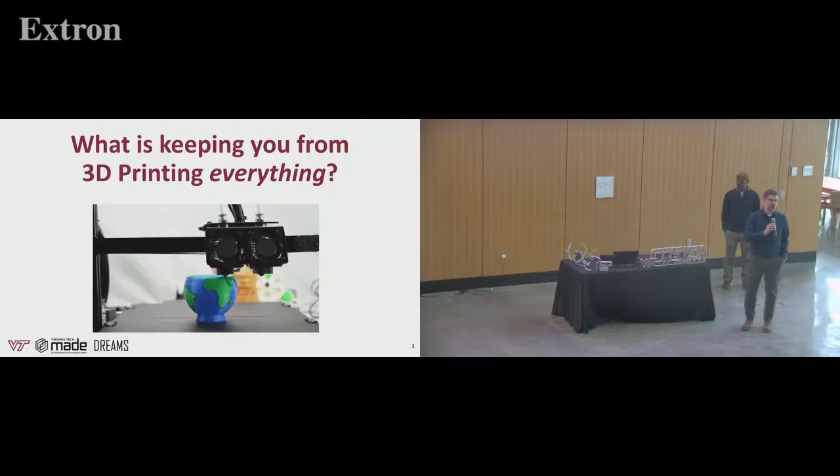So young and innovative. All right, we're going to start off with a question. What is keeping you personally from 3D printing everything? What's keeping you from 3D printing stuff? Because things fall down? Is that your gravity is the answer? Yeah, like can't print stuff in the air. Okay, what other limitation do you face on a daily basis?

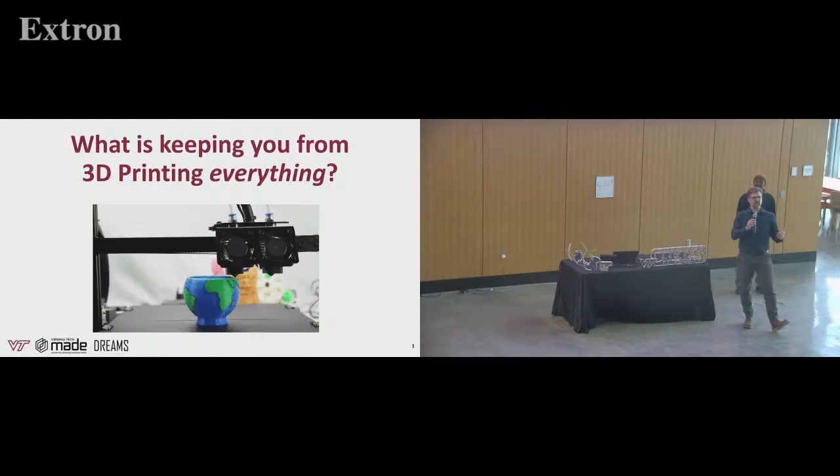Okay, all right, what else you got? What other reasons are making you... Why aren't you making everything with 3D printing? What keeps you from doing it? It's too expensive. It's a lot of plastic. Thank you so much for that one. I'll pay you later. I don't own one, and I have not done any of the training to access any of the studios, and I don't have any time. Thank you, Tim. All right, so we'll pay you both afterwards.

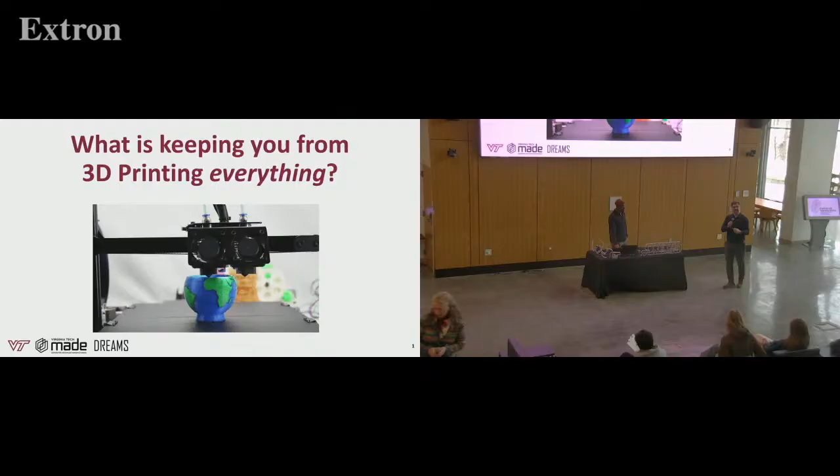Yeah, so one challenge might be it doesn't have the materials you want. Another reason might be it's too expensive. Another reason is it does still require a lot of expertise, although that's getting a lot better in the plastics world. But did you know you can 3D print metal?

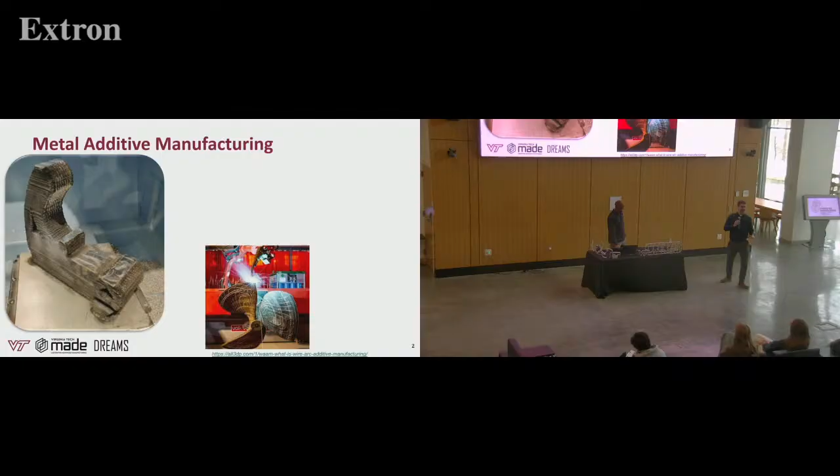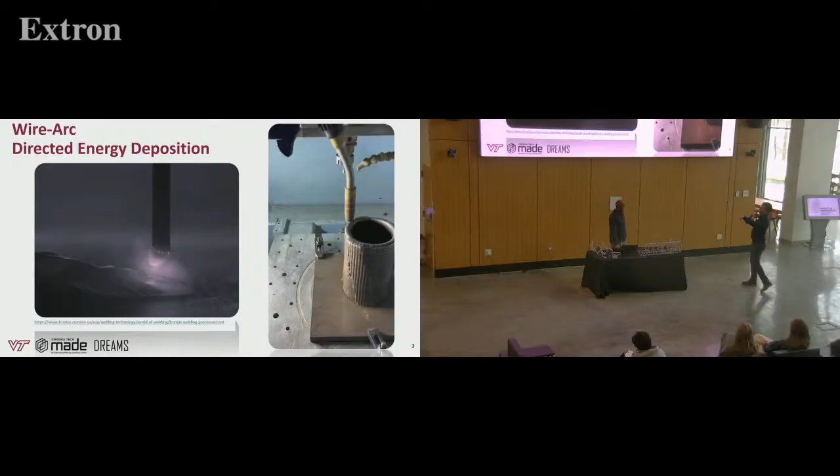That's an image on the left of something we made at Virginia Tech. You can make really large things with metal printing, and this is not extruding molten metal out of a nozzle. It's actually, in this case, literally a welder duct taped to a robot, and just like plastic extrusion, it's depositing metal layer by layer, and people are using it to make things like bridges and propellers for Navy submarines.

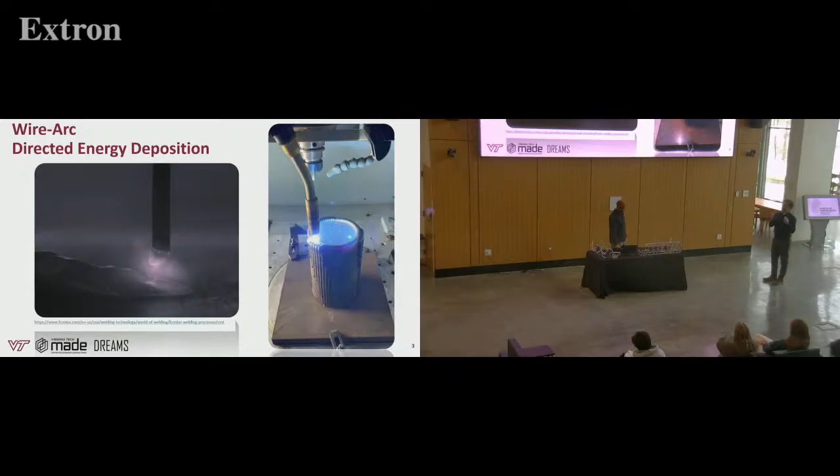The challenge with that process is it's expensive, although not as expensive as other metal processes, because it's just a welder duct taped to a robot, perhaps. But it requires significant expertise to operate that machine, handle the tool pathing and the metallurgy. And even when you're done printing, you need another expensive machine, like a vertical bandsaw, to cut that metal part directly off the plate, since it's actually welded to it. So it requires another piece of equipment just to get the part off. Then you have to do additional machining to clean up the rough surface to get to the final shape you want.

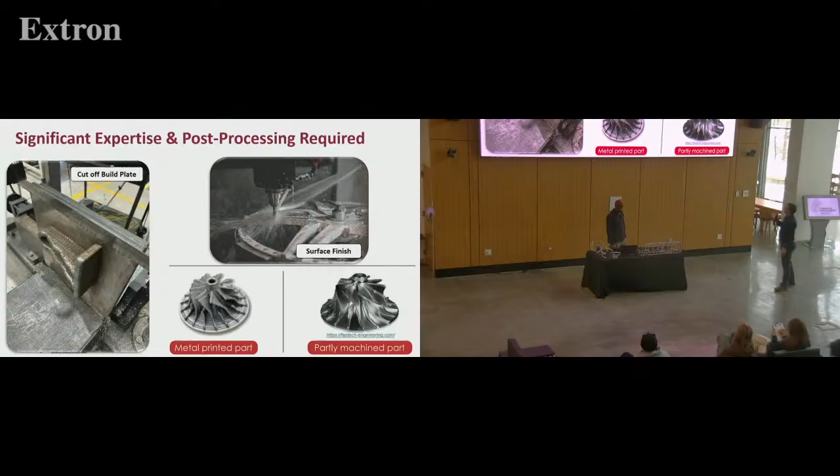So the question we asked is, what if you could really lower the barrier to metal 3D printing the way we did for plastic 3D printing almost 10 years ago? That's the question we'd like to propose to you today and what our team worked on.

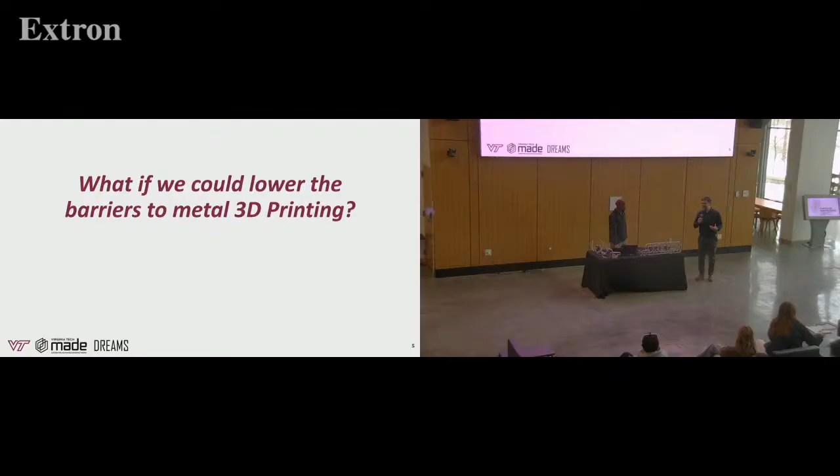This team was led by Bimnet Mola, a PhD student in our group, alongside Ian Ho, another PhD student in mechanical engineering, and our collaborators Lisa McNair in engineering education, and ICAT and CENI, and Brook Kennedy in industrial design. On the next slide, you'll see two key innovations that helped us lower the barrier, and they both belong to this very smart PhD student, Bimnet.

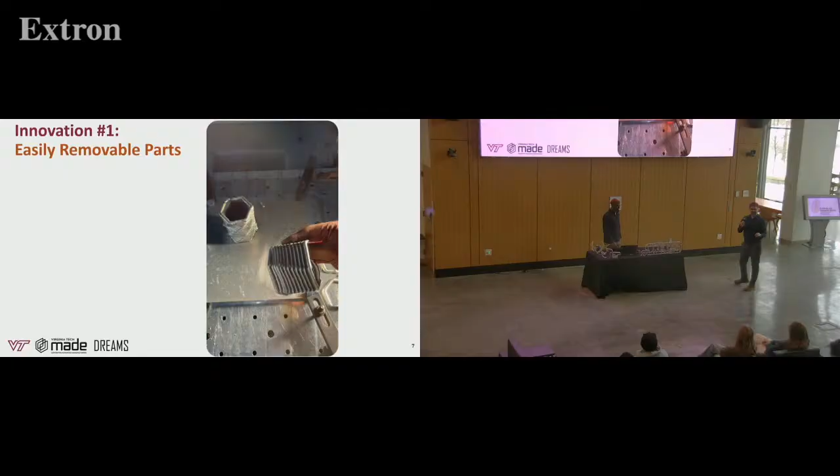The first one is that Bimnet found a way to set the settings of the welder so it doesn't weld directly to the part very strongly. Traditionally, you cannot remove the part off the build plate; you have to go to that bandsaw. But Bimnet discovered a way to have a very loose weld on that first layer that allows you to literally just remove the part, maybe not always with your hand, maybe with a tap of a hammer. This allows us to completely skip that second machine, and that expensive cost, expertise, and danger. You can literally just tap the part off the build.

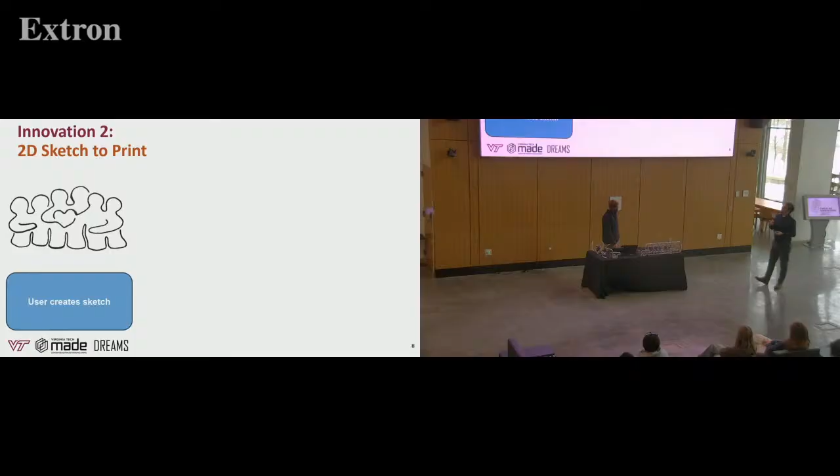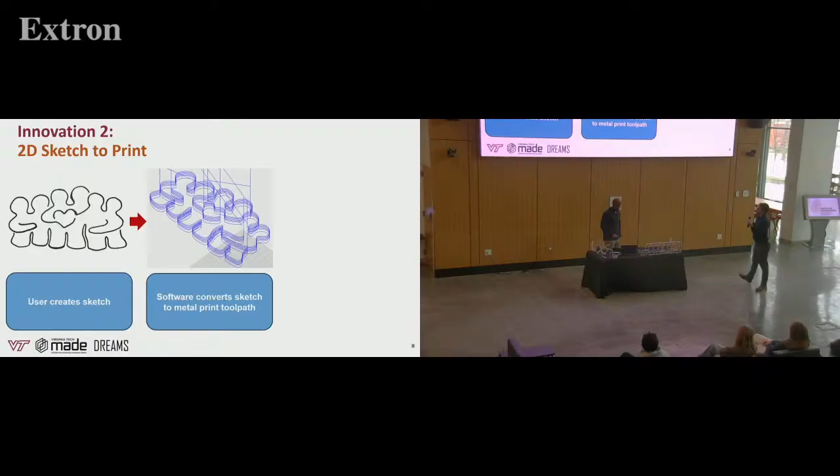The second innovation Bimnet worked on, along with other students in the group, was design. That 3D software has another barrier to entry—forget operating the machine, just learning how to design things. So we said, what if you could just have a napkin sketch, a 2D drawing, and take an image of that? Could we create software that automatically takes in that sketch, populates as many layers as you want, and then automatically generates all the instructions to the machine to actually print it in metal? That's the big idea of sketch to print in metals.

So what we did is actually create a graphical user interface that allows you to do that automatically. You literally just upload your camera photo and work through the process to get to step 4, where all those instructions get sent to the machine. In this case, we had a high school student intern work with us over the summer to get that done, which is super cool.

And I'm going to pass it to Bimnet for the next idea we had, the third innovation, if you will.

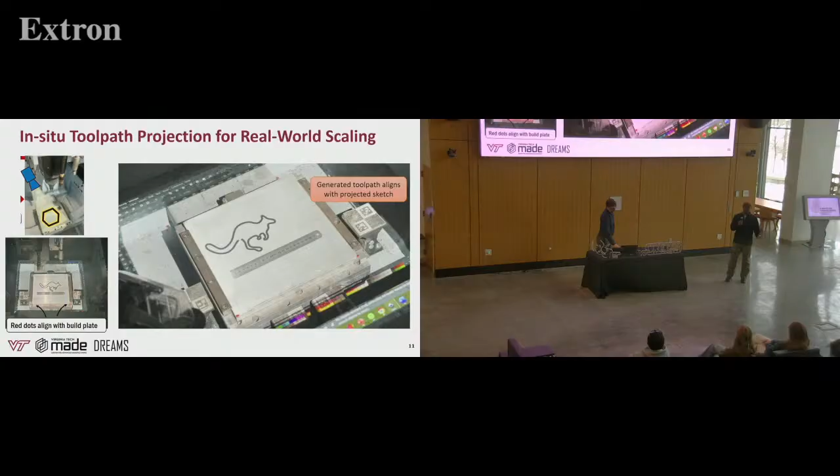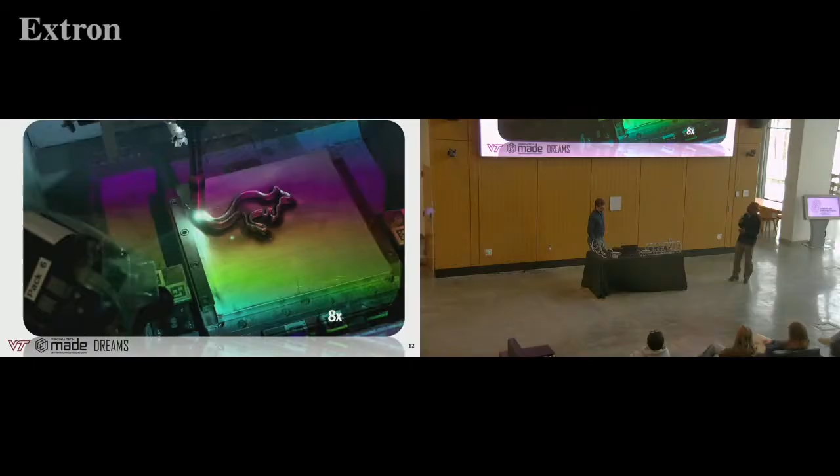One of the things we did, as Dr. Williams just spoke about, is create this workflow for sketch to metal 3D part. But in the world of design, if you're working on a computer, at least I can't visualize what a millimeter will actually look like from the screen to the physical world. So we incorporated a projector into our print space so we can project the design we want to manufacture. This lets us work in the real world, kind of like augmented reality—this is a very V1 step of that. We project the drawing, and the machine is 1-to-1 scale with that projection, so wherever your hand goes is where the machine will go to print that design. That's what it looks like in real life. We've tested it and manufactured some parts of what you're actually looking at.

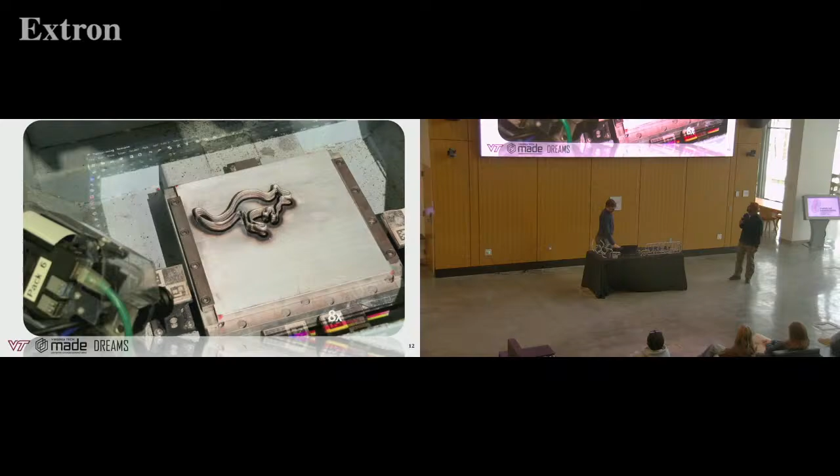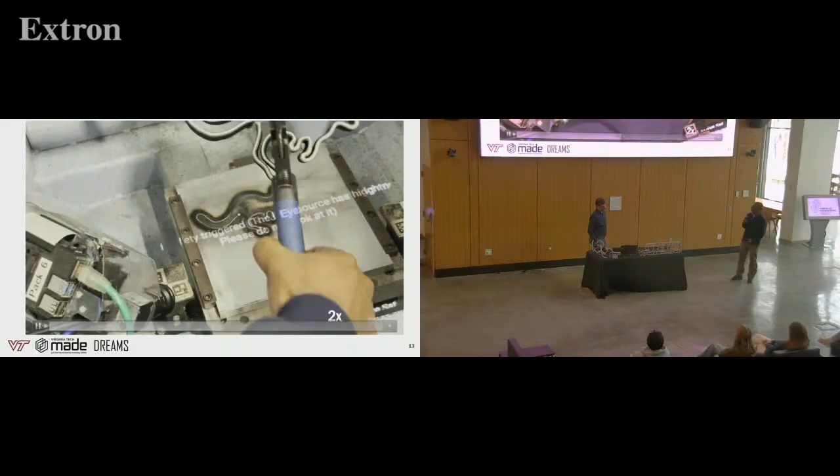This is the printing process after we've validated the projection, and then once it's done printing, you can walk up to the machine and take off the part, as so.

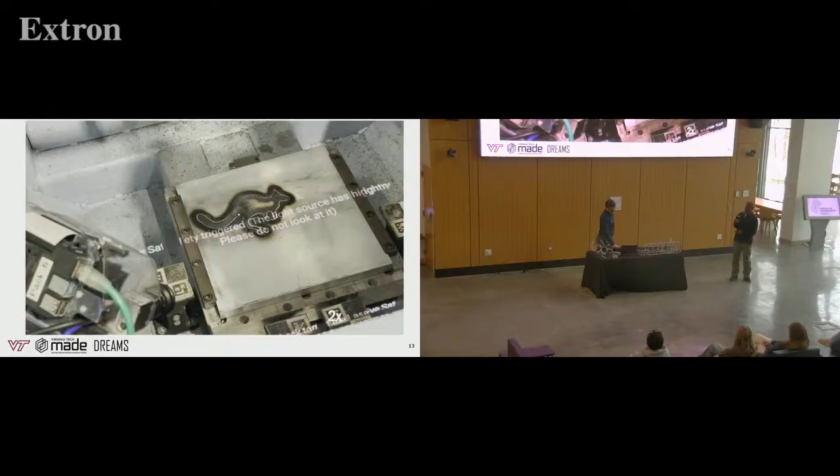It's a very simple, really easy to use workflow where we're taking the expertise out of the process, so that as long as you have a pen and paper, you can make this work for you. To actually design something like this and tool path it, in our lab traditionally it would take several weeks to prepare the file just to be able to print.

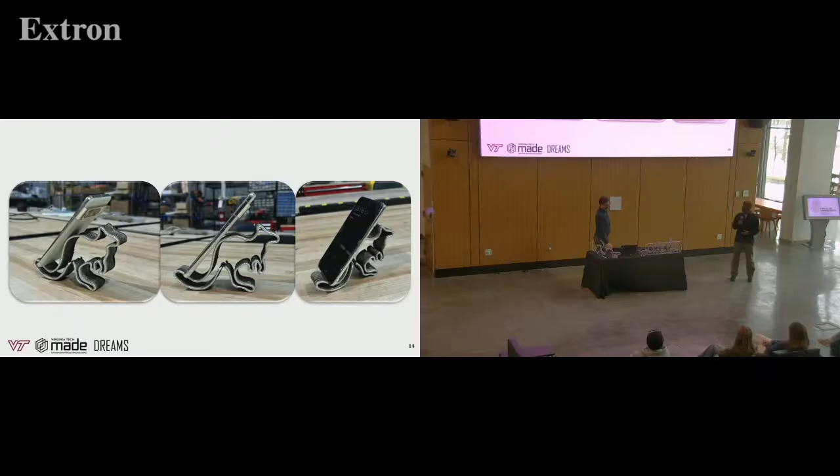But we're removing all those steps for early designers, and what you're actually looking at is a design developed by some 5th graders. Because we've made the design process so simple, we can put this in the hands of users. Part of the ICAT grant, in collaboration with Lisa McNair, involved outreach programs where we brought in elementary and middle school students to work with the software.

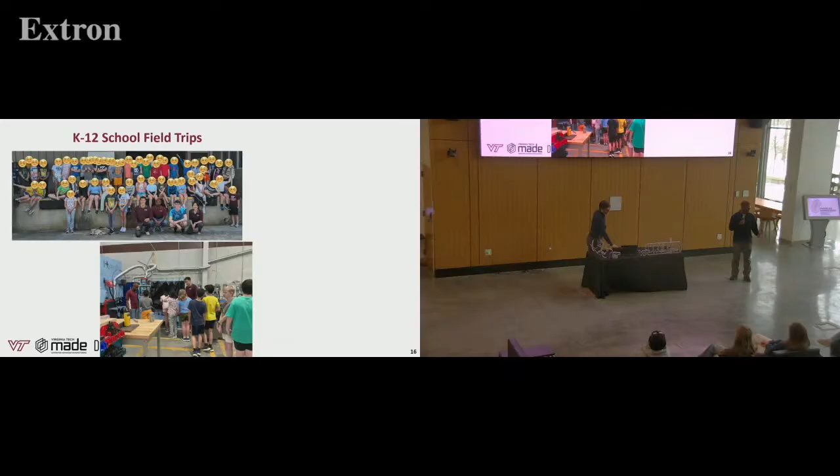Here you can see them designing their parts. Then we took them to the actual lab so they could see their parts being printed. So they've seen the entire manufacturing life cycle, from design to manufacturing, and they could take some of their designs home. We're not printing everyone's designs, but some kids got their designs printed out.

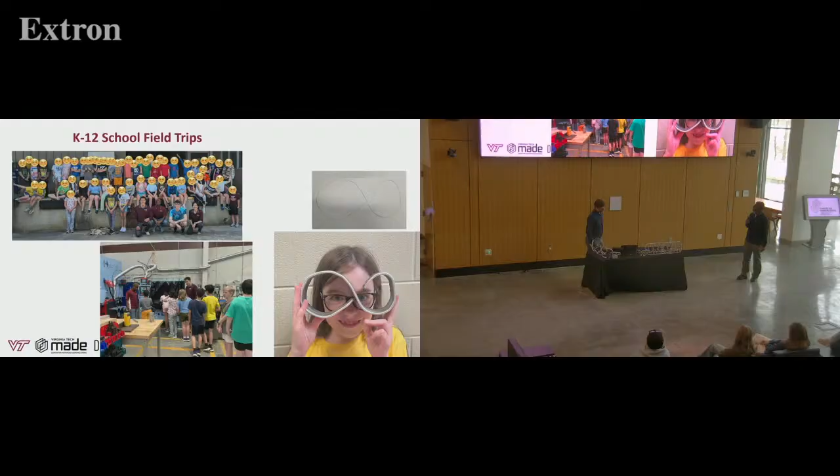Working with Lisa and Phyllis, we did a lot of outreach with CENI at ICAT, like Hokie for a Day and the Science Festival.

One of our favorite activities the students came up with was bringing lots of different 3D printed parts and asking the students, hey, is this 3D printed? What's amazing to me, over many years of doing this, is we've changed from no one knowing what 3D printing is to now everyone thinks they know what 3D printing is. What's great about this exercise is they all push the metal to the not-printed side, but occasionally they'll see something and say, hey, that has layers. So they start to think about this, and it's a really fun way to engage lots of students across the region in this area.

BIMNet also led a lot of summer camps with the CEED group at Virginia Tech and the College of Engineering, the Center for the Enhancement of Engineering Diversity, where we got to do workshops with people historically underrepresented in STEM, in middle school and high school, pre-college students coming to Virginia Tech to learn what it means to be an engineering student, and they're actually in the lab doing the same design exercise.

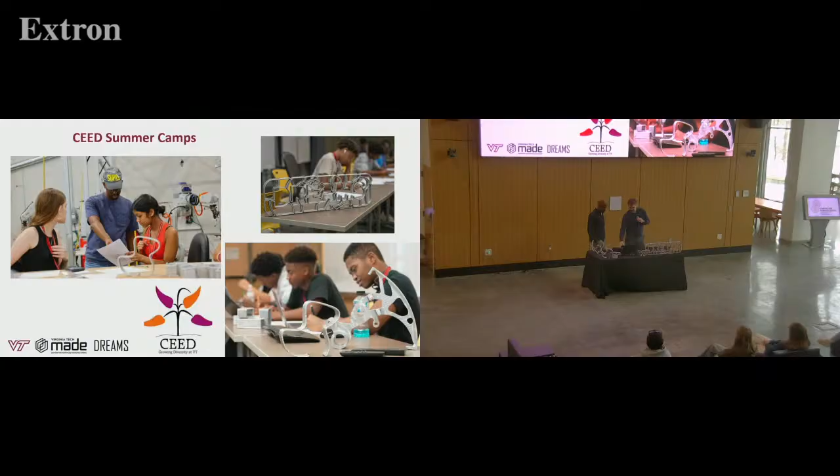What's interesting about that exercise is we have to teach them that yes, this process is great, but it does have some catches and caveats. So we actually teach them about design for manufacturing and engage them in drawing, sketching, and then printing their parts. And I'll go back to BIMNet because he also worked with Lisa on the ID Pro class, which is a pretty cool exercise as well.

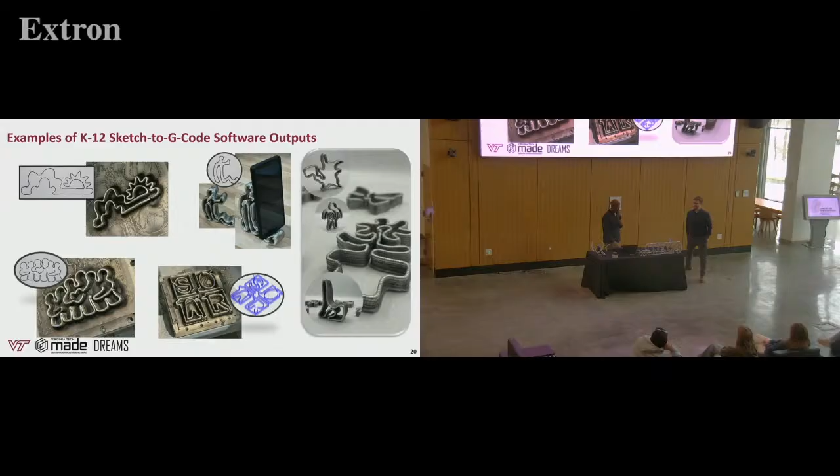Last year, fall '24 and spring '25, we worked with a group of undergrad students to take these past simple designs, like you saw in the last slide where they're just simple contours, and we wanted to see what we could actually do in terms of function with this process. With a team of undergrads across disciplines from engineering to architecture, we started to think about the fact that we're printing aluminum, or metal that is conductive. Can we use the part itself to both structurally reinforce the structure and use it as a conductive pathway for electricity? So we did some initial tests where we embedded the metal within the plastic.

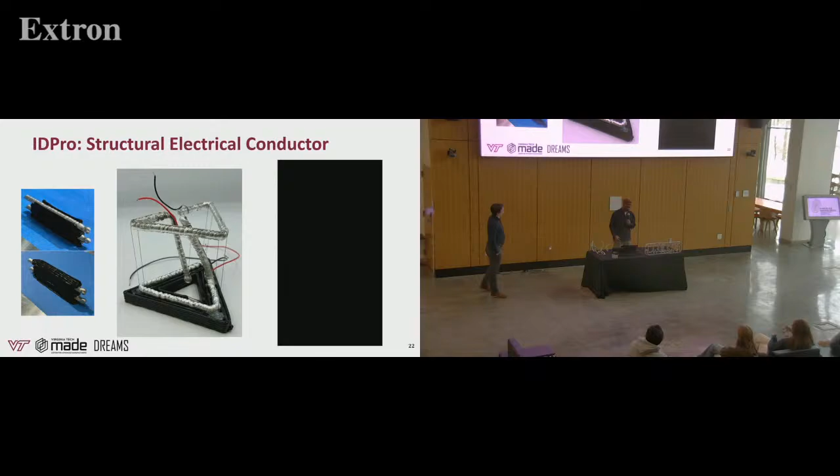We were able to build a tensegrity table. It's essentially floating, not contacting each other. The strings provide the tension for it to stand up, and the metal provides that structure and the electrical pathway. The wires you see here are just for the final contact points between the battery and the structure, and then from the structure to the element we're powering. In this case, we put a fan on there.

I would have preferred a lamp, but I was working with a ton of engineering students, and they wanted to put a fan on there. But the main contribution here is we're pushing this past what we thought we could do with this process. Aluminum is very pliable, so you can bend it into the shape you want and use it as a structural reinforcement and as the pathway for electricity. So some really cool things you can do with that process.

And the semesters were kind of split up. We had some machine troubles, but the first semester, everything you saw in the last slide, the undergrads did all of that work. It was led by them.

And then in the spring semester, we had some issues. Yeah, so basically Lisa and the team at CENI then proceeded to think about bringing in teachers and actually getting them engaged in 3D printing and finding ways that they could teach some fundamental concepts using manufacturing to support the basics of physics. And that's something that's really impactful because now you're not just teaching one student at a time, you're teaching the teacher who can then go back to their classroom and continue to disseminate that. So some great work from Lisa and the team.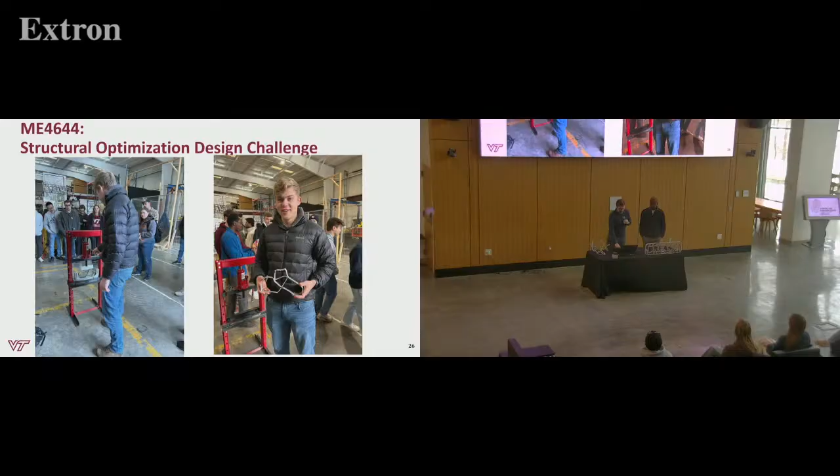But BIMNet and the team have actually supported lots of folks across the university with engineering ideas like this big spring, sort of helical spring idea, and you worked on that with Brooke Kennedy and his team, printed jewelry, the printed sign, and as BIMNet mentioned, the idea that you could actually print these objects flat and then, because it's so pliable, bend them into shape, and then use traditional welding to join them together to make, in this case, a nice wall hanging for one of the other students for fun.

Another collaboration that this enabled, because really what we're doing in our lab is we're creating these new capabilities in what we think are design tools, but we really need to work with designers to think about how to implement them. So I'm really excited to see some architecture students here in the front row, because we'd love to have your ideas on how to actually put this to use.

One way in which we've worked with architects is with Yasaman and Nathan King at the CDR in architecture, where we were actually working on a printed podium. We wanted to have a 3D printed lectern for a big conference we were putting on in September. And over at the CDR, there's this big 10-foot robot with a 100-pound per hour deposition tool that can actually print plastic. So imagine you're 3D printing plastic, but now at a much, much larger scale.

And Yasaman and our student Nima actually came up with this really beautiful, elegant design, and it was really cool and printed really well. But then we noticed one interesting challenge was, podiums are not supposed to do that. So what do we do with that?

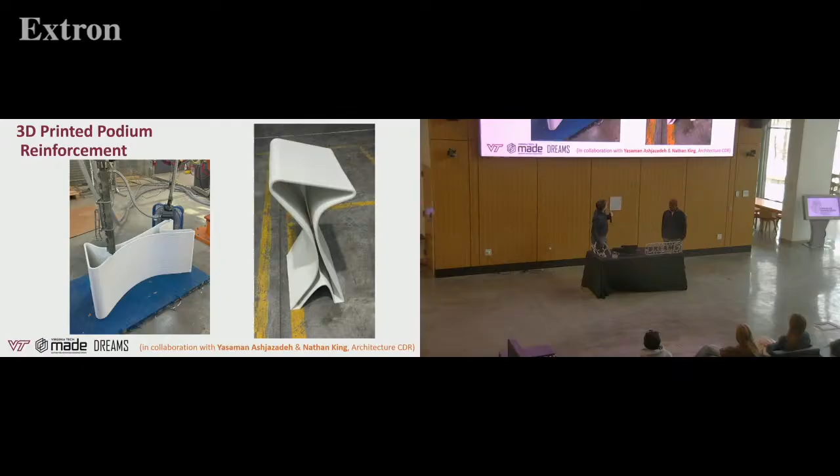So actually, again, working with that new technology of large-scale polymer printing, they then came over to BIMNet and said, hey, is there a way that we could reinforce this afterwards? So BIMNet and the team literally just sketched by hand ideas about how to reinforce this, printed it, and then actually heated the metal up and heat set it into the plastic.

So now actually we have a fully structurally sound, elegantly, beautifully reinforced structure. So now we have two material systems all printed that enable quick discovery and quick solutions to interesting problems. And in theory, we could have run electricity to this as well.

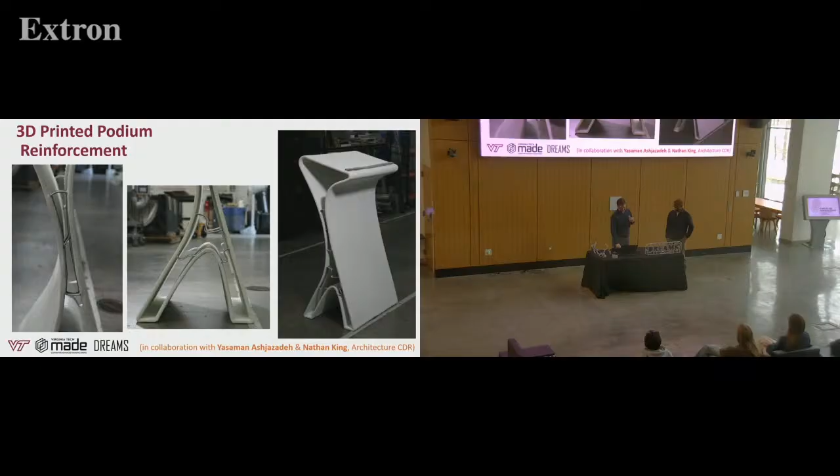So really what this project is all about is trying to democratize metal printing. How do we get this in the hands of as many people as we can, through not only reducing the amount of knowledge required to run the machine, but also the design, going from design to print, also completely eliminating the need to actually have to do a dangerous bandsaw cut, just literally knock it off the part.

And along the way, we got to do some really great work with getting people to learn about advanced 3D printing, changing their ideas about what it can and can't do, talk to them about the new world of metal 3D printing, maybe getting them excited about a career of taking their sort of 3D printing hobby and then seeing how it could translate to an engineering profession or an architecture profession, and that's been really exciting.

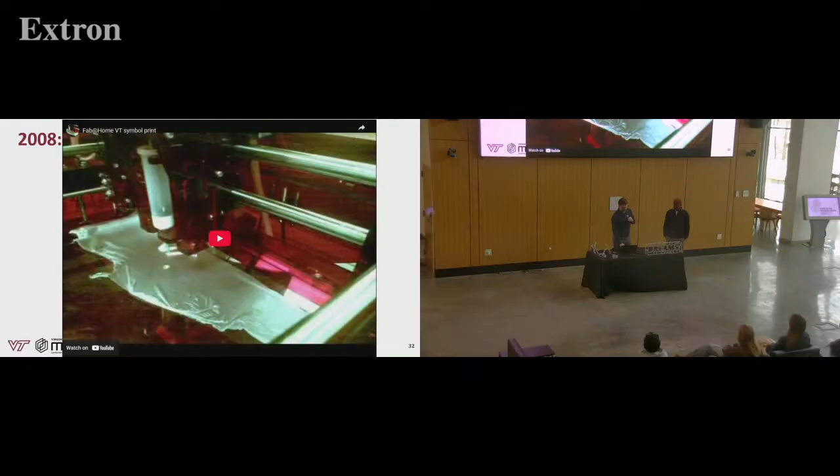So before we go to this last slide, I just want to have one final note. As was mentioned by Phyllis, it's funny, actually, I was teasing you, but really, this is the very first grant I ever had at Virginia Tech. And it was funded by the precursor to ICAT.

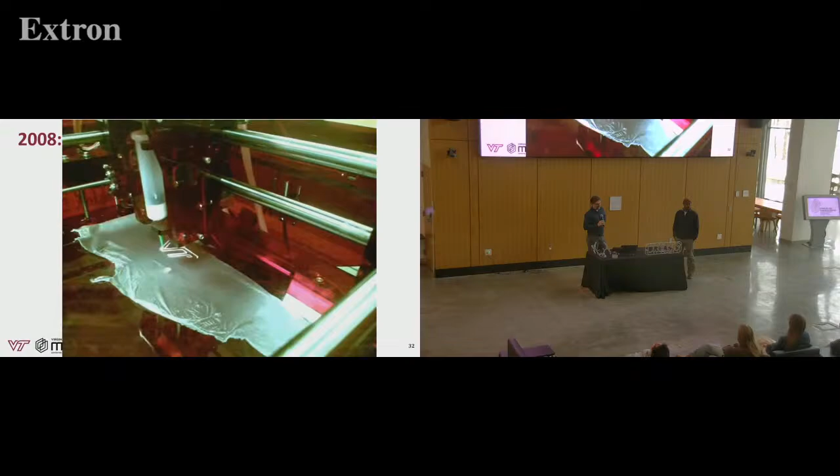And we should mention, Phyllis, if you know about that, that means you've also been here a long time. And this was the first ever desktop scale 3D printer. It's made, it's called the Fab at Home. And it's literally a syringe on a laser cut acrylic frame. And it was made by a friend of mine at Cornell at the time.

And so this small seed grant that we got from the precursor to ICAT allowed us to buy this kit, build it, and then we took it to a bunch of outreach events. And at this time, we were actually printing Cheez Whiz onto crackers on demand. And it was at the time to educate people what 3D printing was, what the idea of layered manufacturing was.

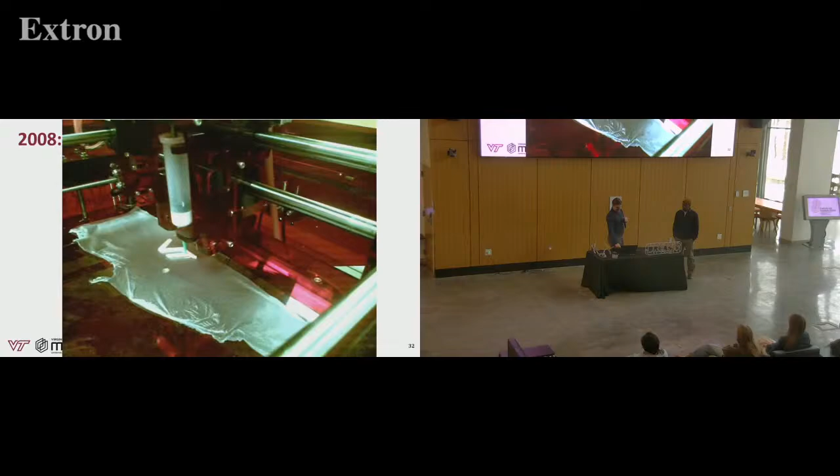And now, not so long, we've come to this world of being able to still engage students, but now teach them about the next evolution of 3D printing and creating tools to engage them in learning, but also engage them as designers and creators, thanks to great students like BIMNet and great collaborators like Lisa and Brooke and Nathan as well. And with that, we'll pause and take questions.

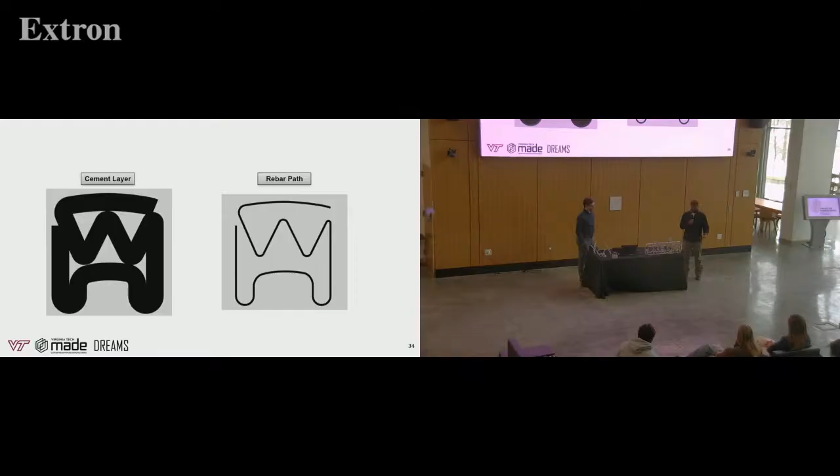Yeah, so all the parts that you're seeing today are of aluminum, but this process is generalizable. So we have started working with steel. We can do this with any material that exists in terms of metal. If it exists in welding wire, we can process it using the same processing technique. So we have some ideas where we want to use the steel as a rebar structure. So if anyone's in construction or civil, one of the ideas is, can we embed the steel within the cement the same way we're embedding the aluminum within the plastic? So some really cool things there.

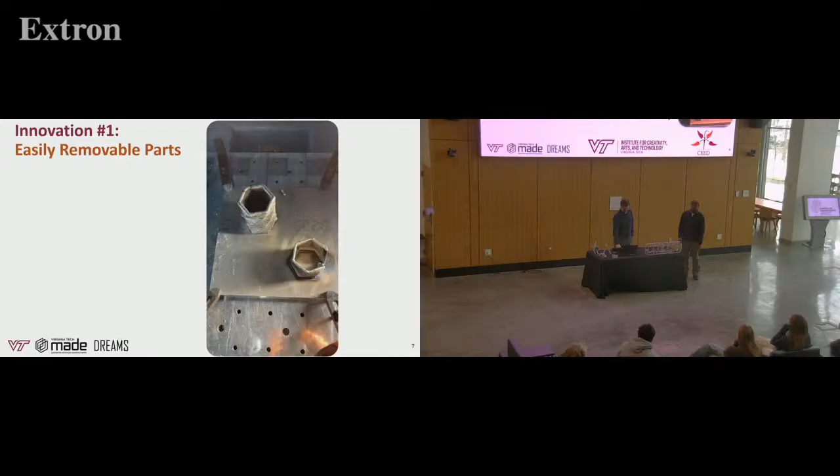You guys said that you changed the first layer so that you don't have to cut it off anymore, you can just take it off. Does that create any structural issues? Does it ever tip over because it's no longer adhered to the build plate?

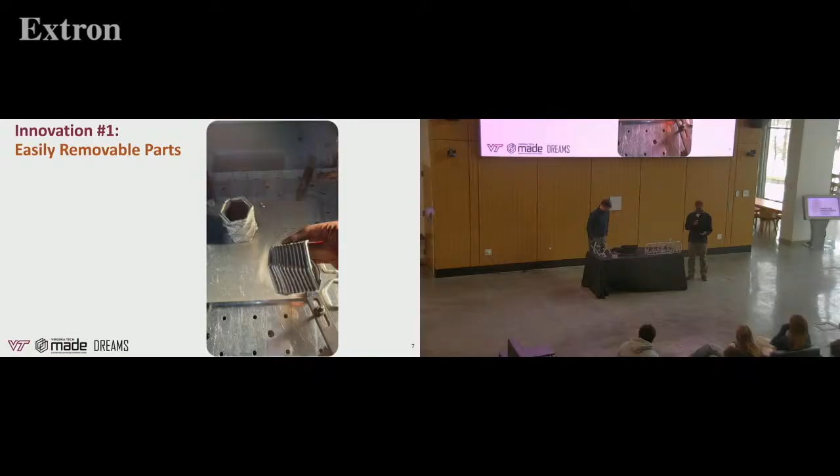That's a really good question. Part of the reason traditional manufacturing permanently welds it to the build plate is due to residual stresses that will actually cause it to delaminate off the build plate. So the first layer is at risk, and in some cases it does start to delaminate, but it won't fully tip over because it's a big enough structure on the first layer. What we're doing in subsequent layers, we're actually using another set of unique processing to reduce that residual stress and prevent it from delaminating. So there's a lot of, my entire PhD is trying to solve that problem, essentially.

Yeah, on that note, there's a different presentation that's his defense, which is all the physics. It's not just magic, it's a lot of really excellent science and engineering by BIMNet and modeling so that it can be adaptable no matter what the material is. You can get this really unique behavior that no one else has ever seen. BIMNet's first idea to use this was, hey, we could actually use it to just quickly print art. That's what this is all about at ICAT: doing some really great engineering and science, and then translating it to work with creative folks to think about how we can use it as a creative tool. The other presentation is a bunch of numbers and math and physics, and at the end we say, oh, by the way, you can also make this really cool stuff. So this is the inverse of that presentation.

I'll be there in a minute.

With what you're doing right now, how much money and time are you saving or potentially saving with doing this compared to just regularly using a welder?

I don't know if there's a real answer to that. We're not competing with the traditional way of manufacturing. On the other side of my PhD, there's some other work we're doing where we're using the same processing technique to build more chunky parts, kind of answering the original question from her right there. But in terms of some other work we're not going to speak about today, we're saving a lot of time and money. Within the process you've seen today, we're not competing with traditional manufacturing, we're really presenting a new novel idea. So there is no metric on time saving and cost saving.

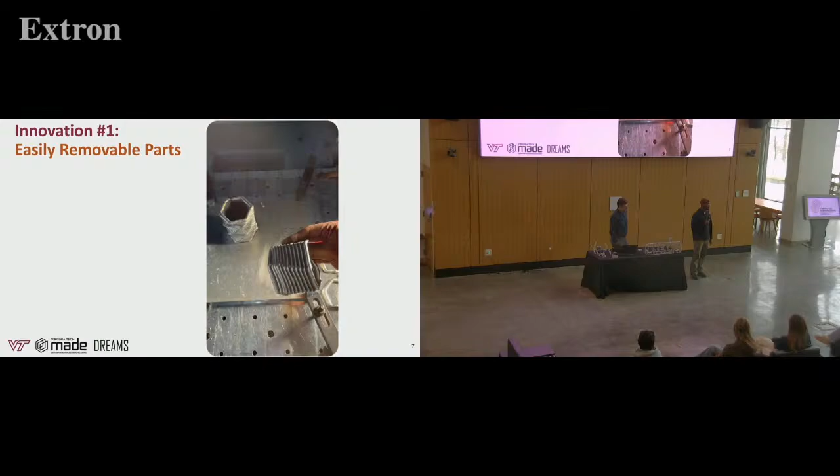To add on to your question about cost - if you look at the parts, what we're really doing is just bending the metal. There are traditional processes we can compete with in terms of wire bending, but those machines are also 50, 100, 150K. So we're reducing the cost in terms of democratization, opening the technology space to people who traditionally wouldn't have access to this equipment. There's no real metric, but we can compare with traditional manufacturing where you take aluminum sheets and bend them into form. But that goes back to technical expertise - you need a lot of people who know really good science to manufacture some of these things.

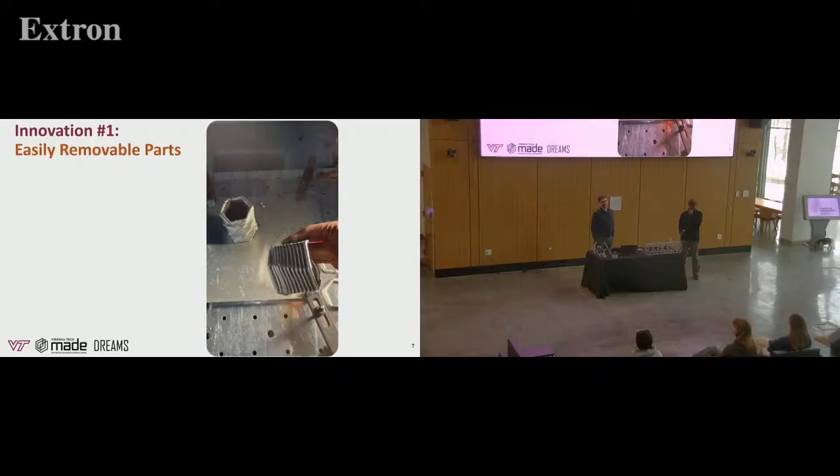So the tool you made, the web interface, is basically just taking a 2D drawing and extruding it. Are you thinking about taking this into the third dimension rather than just pulling it into that, or being able to take multiple drawings and automatically create toolpathing from 3D sketches? Yes, there's a part floating around that has it twisting in 3D space. What you're seeing on screen is just a simple extrusion, but we do have add-ons where we can start to alter a single sketch and rotate that. In future iterations, we're hoping to incorporate sketch 1, sketch 2, sketch 3, and bring it all together.

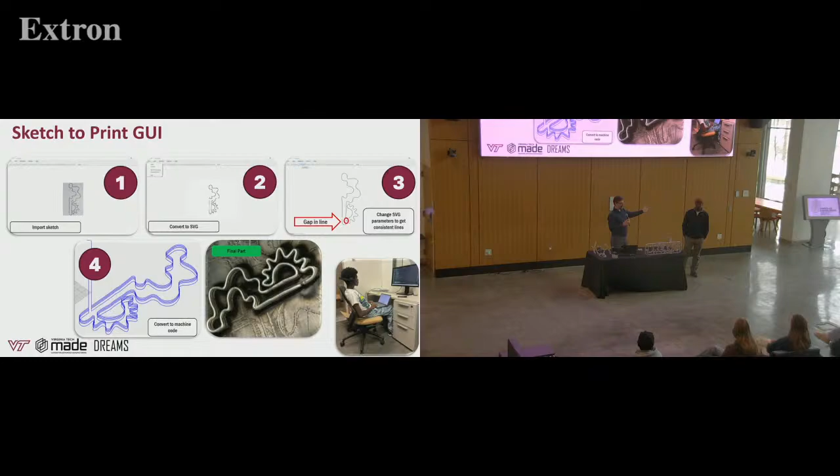On that note, we're creating a new building, Mitchell Hall, that's being built - it will open in 2 years. It will have a very large manufacturing studio with one of these systems, making it more available to folks, because right now the only systems like this on Virginia Tech campus are in our lab. So we're in the process of creating spaces to give people more access to use this software.

But fundamentally, at the end of the day, this is welding - it's dangerous for the eyes, can be dangerous for the lungs, so you'd have to install ventilation with this. It's not yet going to be at that desktop-in-your-garage level. But this idea of 2D sketch to immediate printing was something available on some website for polymer printing too. The key part here is all the instructions that take that blue line and give detailed instructions about how to create that removable component - that's something we can also make available on the web for other people who have that system.